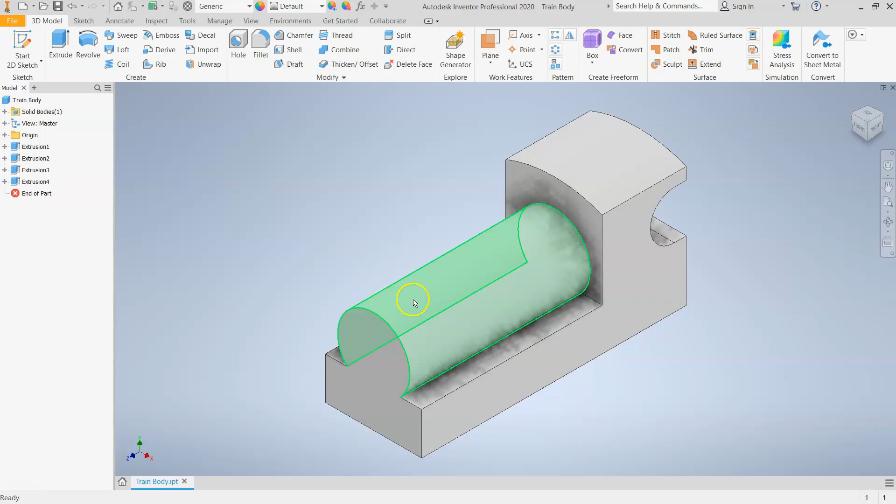We're going to learn how to make a flat plane on this curved surface here so that we can drill a hole in the top. And then we'll also drill holes in both sides for the wheel axles.

And then the last part we will need, and this you can't see from the diagram, but we need a hole back here for the hitch that's going to go there so we can connect cars to the train, in theory.

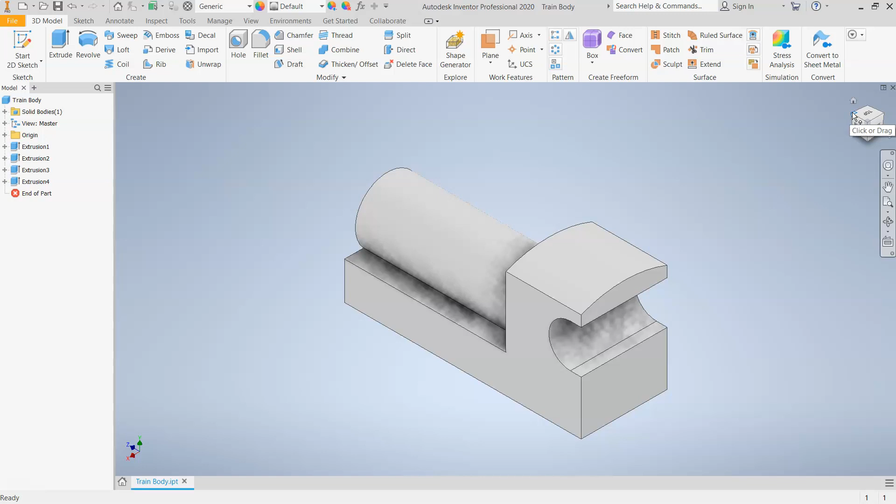So we're going to learn how to use the hole tool among some other things. If you're looking at your diagram of the train body, there's a couple of different symbols. First, remember the O with the slash through it, that's diameter, so that tells us the diameter of the hole. But you also have this down arrow, and the down arrow represents the depth of the hole. When you drill a hole, you can control how deep the hole goes, and that's what we're looking for with depth.

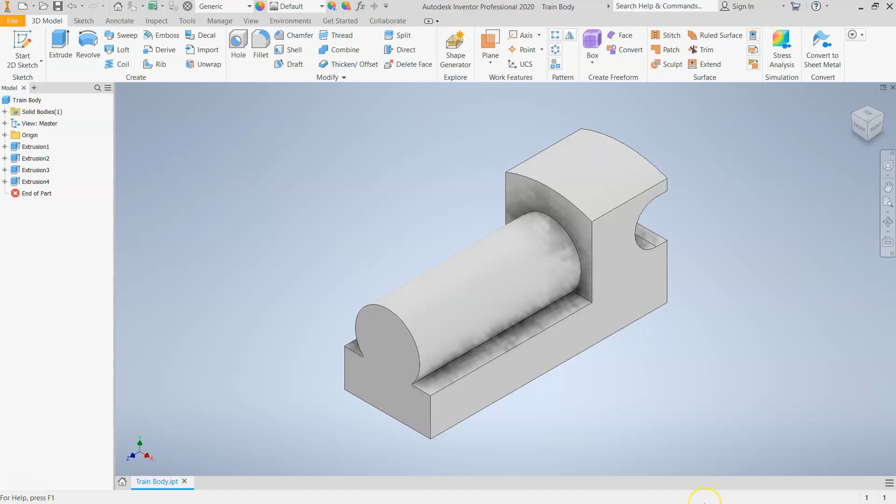For the axle holes, you'll also see something that says UNC. We'll talk more about that later, but basically in machine parts you have different kinds of screws that you can put in. It's a way of establishing exactly what drill bit to use and what types of bolts will go in those holes. So 1/4 inch 20 UNC is a very standard part, and we'll learn how to find that in the drilled holes menu.

Let's get started with just the front here. Let's go ahead and put the holes for the cow catcher. I'm going to right click on the front and then click New Sketch.

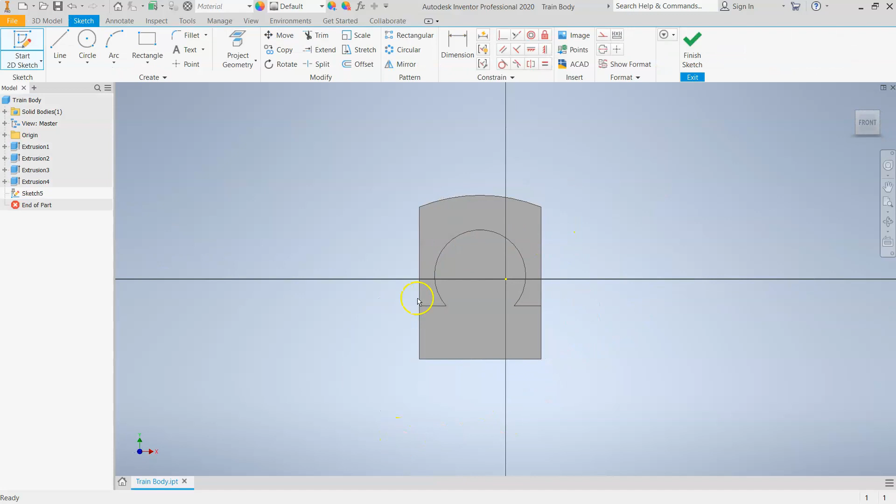And there's the front of the part. We are going to be placing... I'm going to go to point, click on point, and I'm going to be placing a hole here somewhere, and then a hole somewhere here, and then a hole somewhere here. So those are my 3 holes that I'm going to put in.

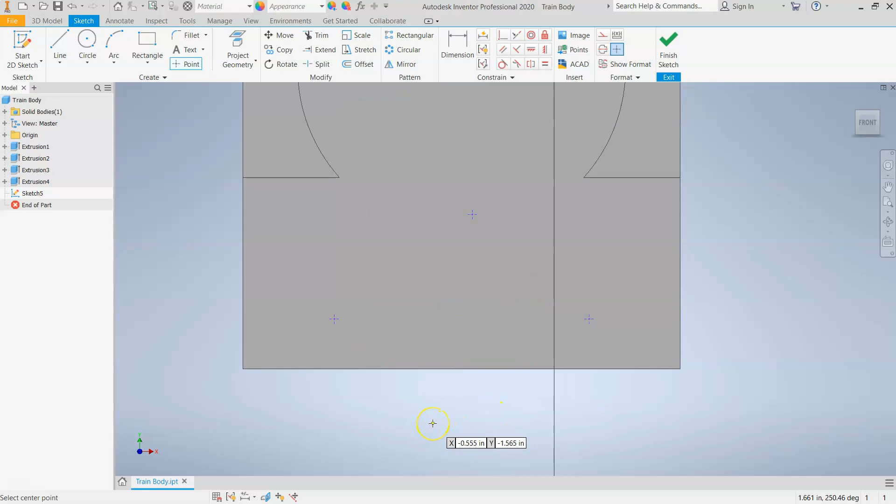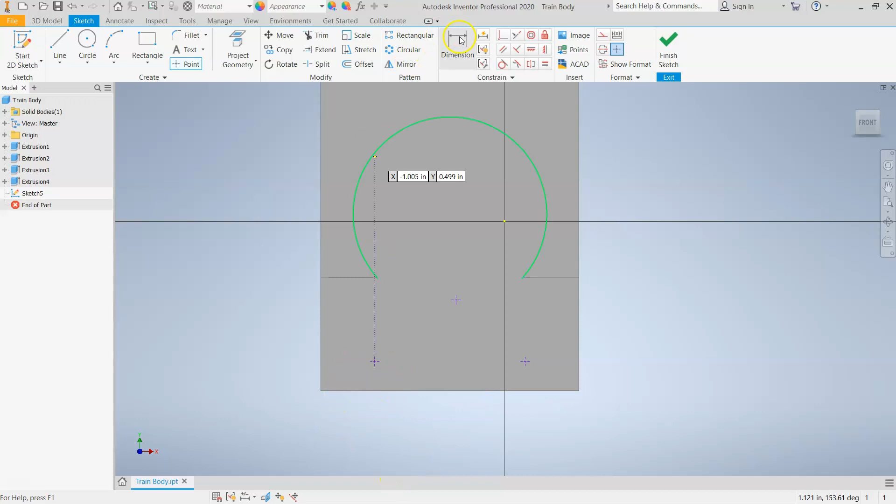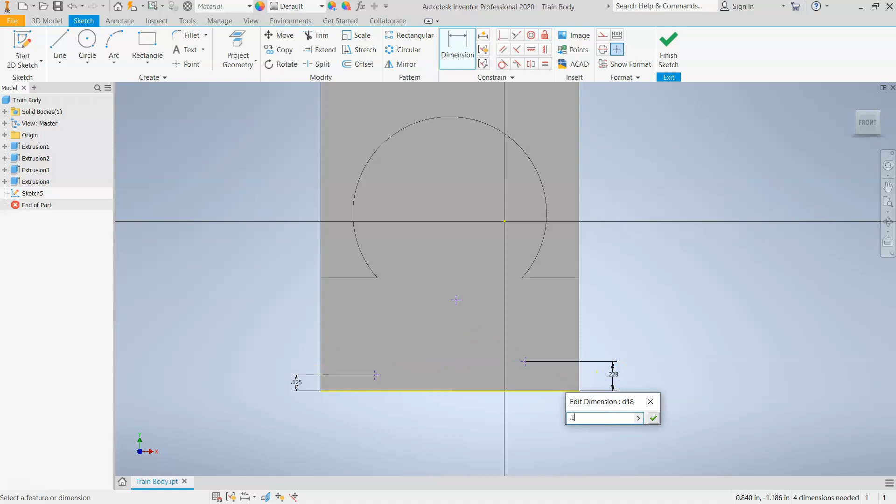I'm now going to dimension those individual marks based on the measurements on the diagram. First I want to figure out how far from the bottom this hole should be. If we look at the diagram, it looks like the 2 bottom holes here are 0.125, so I'm going to dimension this point to the bottom as 0.125. This one as well from the bottom, 0.125. And then the top hole is another 1/2 inch above that.

So it's going to be 0.625. Now we've corrected those for the y-axis. We need to now place them horizontally, and it looks like we have a dimension of 0.375 from the left. So this left side is 0.375 from the left edge, which means it's going to be 0.375 from the right edge.

Now, the diagram that you have says measure everything from the left. So I can click the left side, and I can click the far right dot, and I basically know that it should be 0.375 from the far edge, or we can just type in 1.625. And if we added 1.625 to 0.375, you get 2 inches, which is the total width. So that's another way to do it, all using the same beginning point, as opposed to dimensioning from the left and then dimensioning from the right.

The top hole should be centered, so that just means it's going to be 1 inch, exactly, from either left or right. So now those placements are done, we have them in the right place. So we're going to finish sketch.

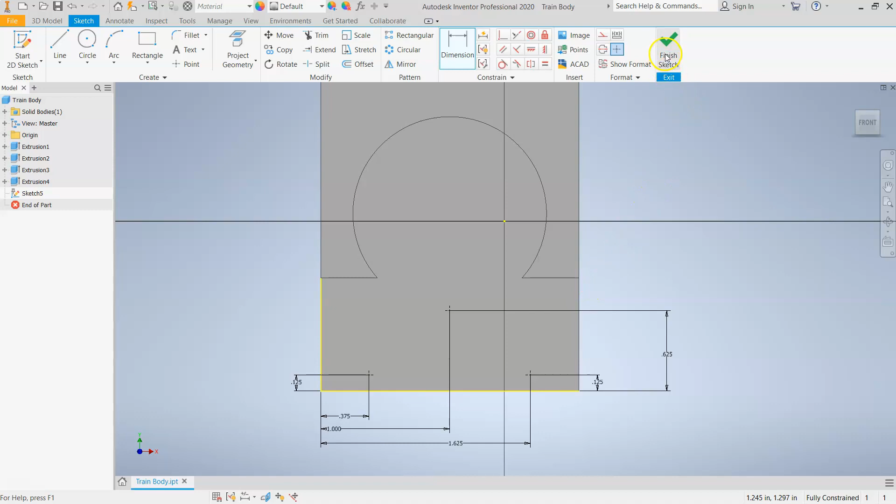So I still have my marks. These are called center points when we make holes. The next thing we want to do is use the hole tool. Now I could have, in theory, drawn a circle and then extrude cut the circle, but that's not really what we want to go for here, because we want the information about that hole to show up when we do the drawing sheet, such as depth.

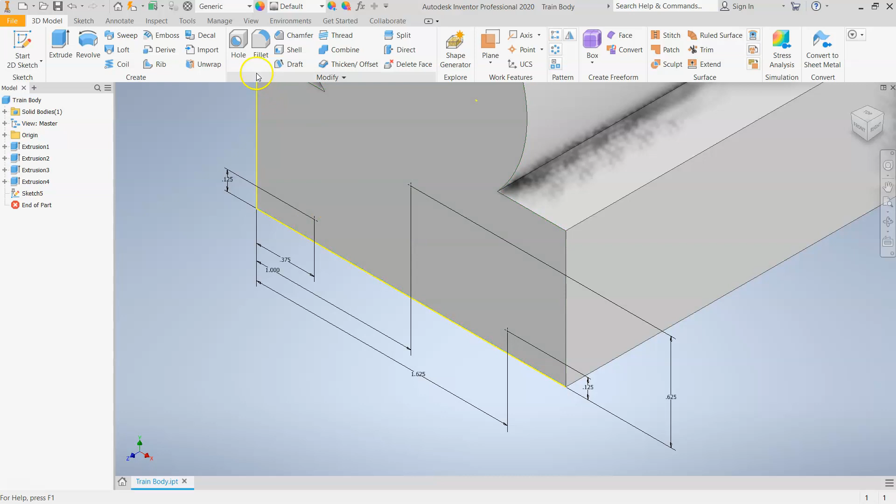If you just extrude cut a circle to make a hole, you wouldn't get the information for depth on your drawing sheet. Okay, now that I have my marks created on the front, I'm now going to drill holes. So I go to the hole tool. Now, a couple things about holes: there's a lot of different types and sizes. Some of them have 2 different diameters because the top is wider than the bottom, so there's a lot of options. First thing you want to do is make sure you're on presets, and you want to do no preset. So this should be straight, a straight cylinder.

Then we want to make sure that we've selected all 3 points, and it has. It is a simple hole. And then we have termination. So we're going to change the termination. Termination tells you how deep the hole should be. According to my diagram, the hole depth is 0.125. So it's a really shallow hole. You can see how shallow that is. It doesn't matter if it's flat. Let's just change it to flat, and that'll get rid of that number.

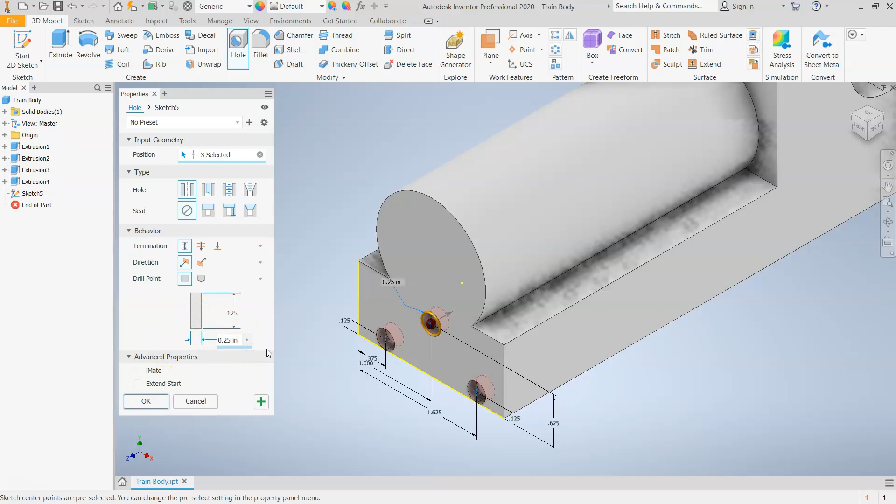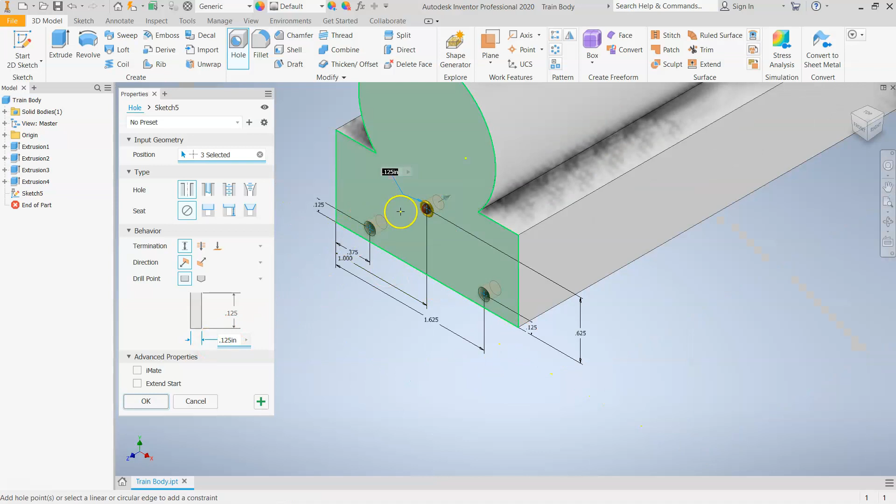Now, what's the diameter of the hole? It's the symbol with the circle with the slash through it, and you see that it's 0.125 as well. So these are tiny holes. Oh, I gotta delete the previous number. There we go. So we have 3 holes. They're all the same size. They're all going back in the right direction. And so that looks like that's finished. Click OK. And so now we have 3 holes drilled into the front of the train.

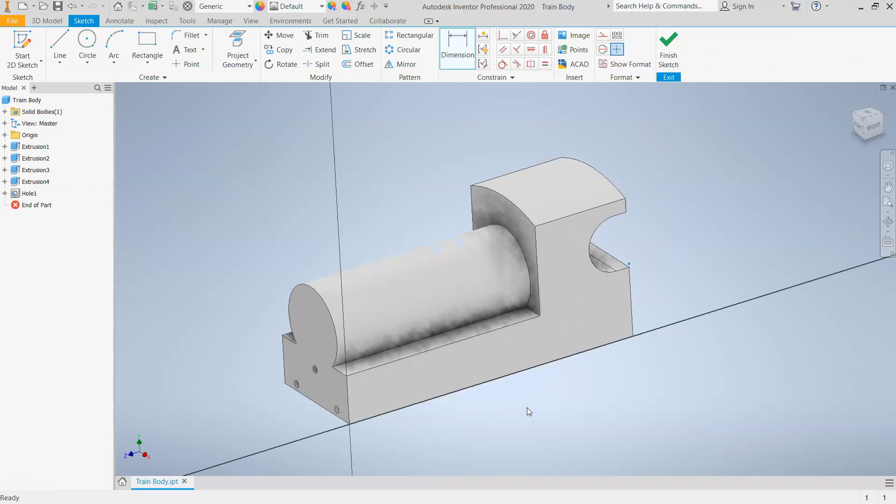All right, we're going to do the same thing with the side. New sketch. All right, and so we want to place marks. I'm going to place a mark here. I'm going to place a mark here. Now we want to use the dimensions on the diagram to find out where those marks are located. So along the x-axis, this mark should be 1 inch from the rear of the train. And this mark should be 4.5 inches from the rear of the train.

Height-wise, both of them should be 0.5 from the bottom of the train. So those locations are good. Finish sketch. Now I'm going to drill holes. Go to hole tool again. This time the hole says 1/4 inch-20 UNC. So in order to get that kind of hole, instead of a simple hole, we want to go to tapped.

Now tapped brings up a whole other menu here that we did not have before. So we go to tap. Now understand, when we say tapped, if you went to Lowe's, tap just means it's threaded. So this already has threads inside the hole. So it is a unified screw. Right now, you see the number 5 right there. That means it's metric. So I know it's not metric. So I want to open this up, and it says 1/4 inch. So I'm going to select 1/4 inch. And sure enough, the designation is 1/4 inch-20 UNC. That matches the information on my diagram. So this is the hole that I want.

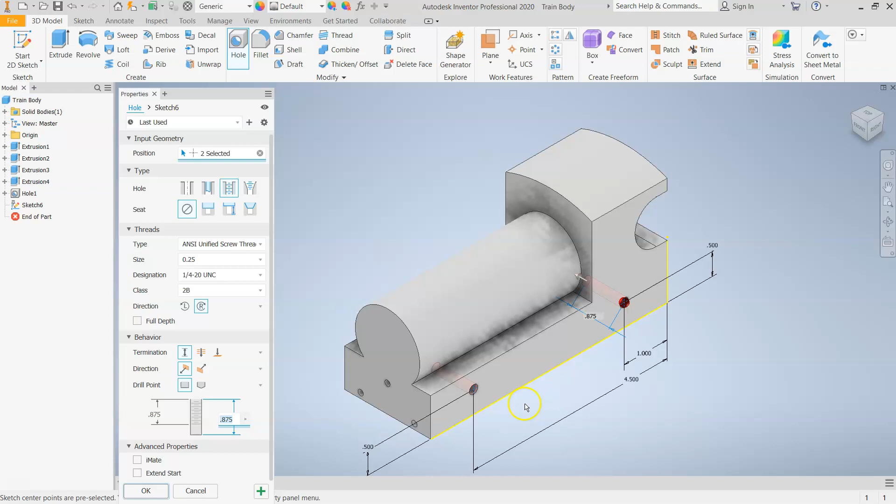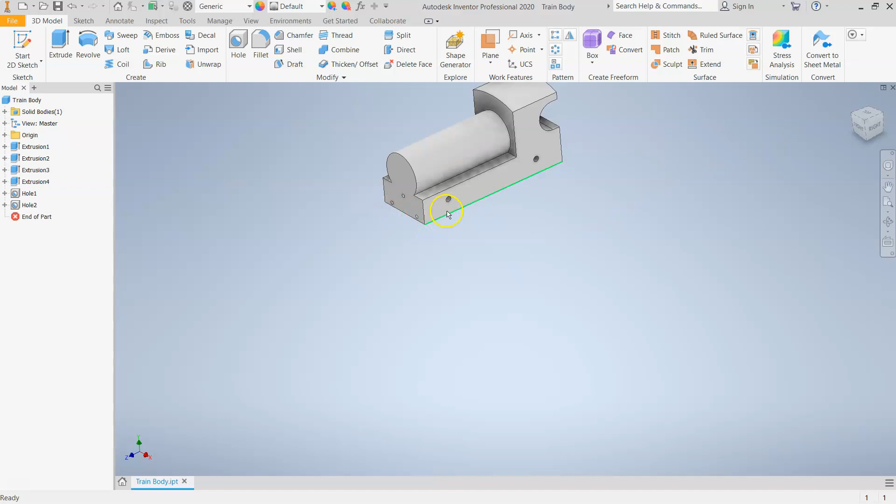And then I've selected both holes. We're good there. Click OK. Now, if we zoom in, you can see inside the hole. And this is how Inventor illustrates that it's threaded as opposed to regular simple. See, there's no little spirals in here, but we do have the little spiral design here. Okay, so that's one side. Let's flip to the other side and do them on the other side.

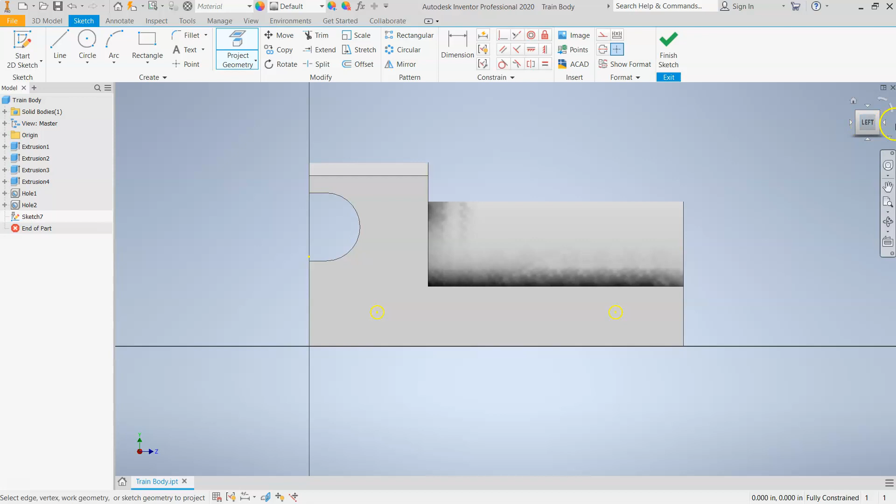Now I'm going to show you a quick, easy way to do this. So once we put a sketch on the other side, instead of redimensioning all the hole marks, we're going to do project geometry and hover over where I think the hole is. So once I find the green, click once and click again. And now we've projected the locations of the holes. We know that those are in exactly the right spots. So I can finish sketch. And now I can drill the holes.

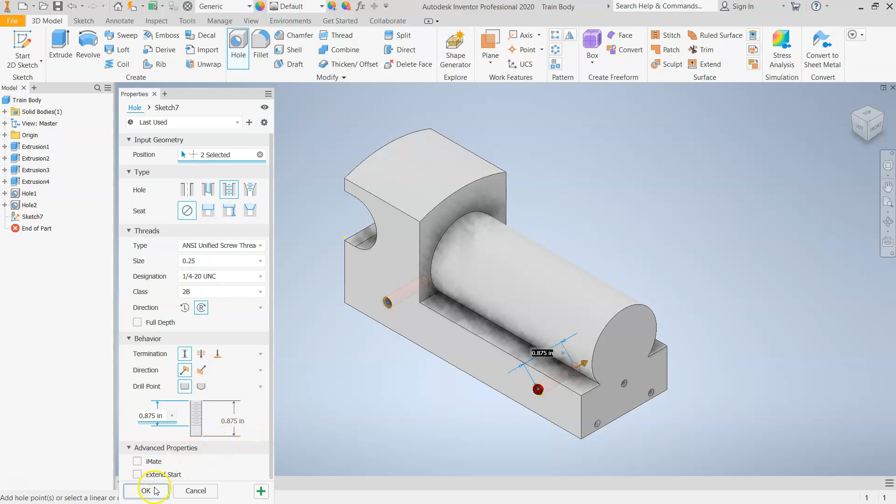We're going to use the same method. It's already selected for us because it's what we did last time. So what it says here in red, select positions. So I'm going to select this first one. And then I'm going to select the second one. So now I have the two holes selected. Everything else is the same from previous. Click OK. And so now we have axle holes drilled on either side of the train.

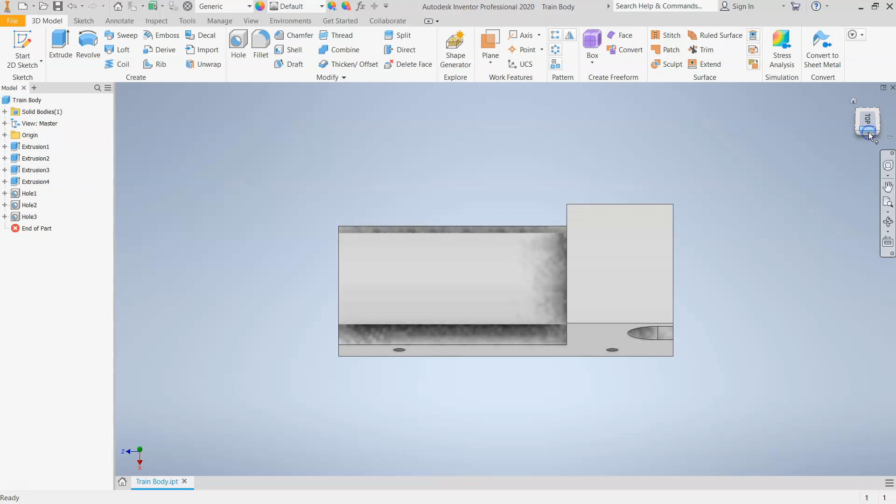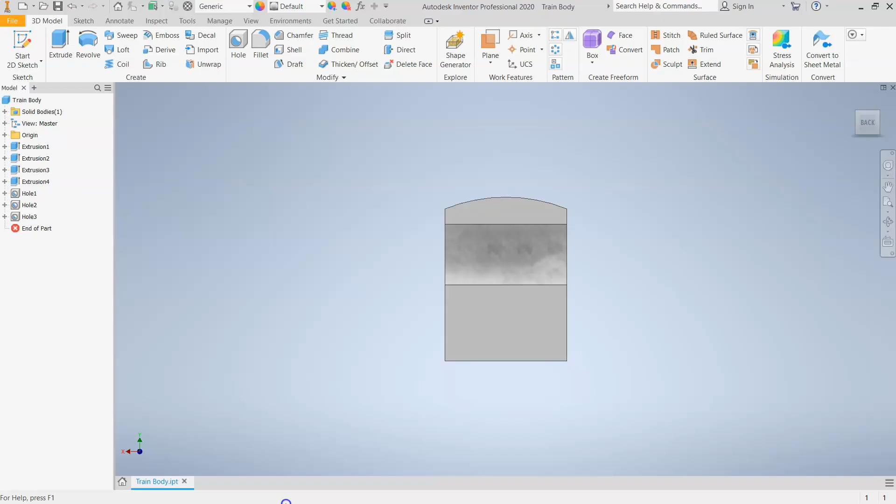All right, next step. We need to drill a hole in the back. Whoops. So to find the dimensions for the hole in the back here, we're going to open up. So we have a diameter of 0.25 and a depth of 0.5. And it should be 0.375 from the bottom. Let's try and remember those. So I'm going to place a mark. Well, first of all, I'm going to put a sketch, new sketch.

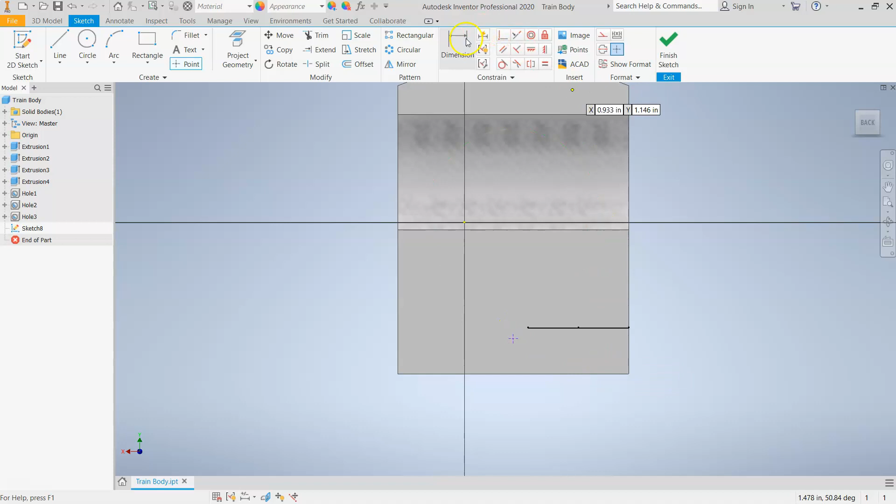Place a point somewhere. Now notice what it's done. It tried to make me select something from the other side. So I'm going to make sure I avoid those lines that have popped up. So I'm just going to click it here. So now I'm going to dimension from the bottom. It was 0.375. I'm also going to dimension from either left or right. It's got to be centered, so it doesn't matter which one you choose as long as you put 1 inch. And then we'll finish the sketch.

Let's get an isometric view so we can see it a little bit better. I'm going to drill a hole. Now this time the hole's not threaded, so what I need to do is go up here and select simple.

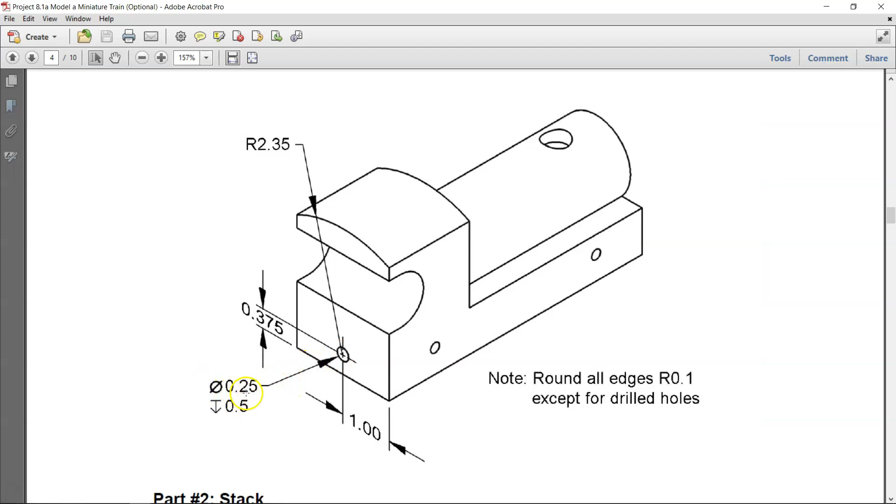And this should turn back to a straight hole where all we have is the depth, which I'm going to change my depth to 0.5. And then we have a diameter, which I'm going to change to 0.25. Let me double check that. A diameter of 0.25 and a depth of 0.5. I think that's what I said. Yep. And then click OK. So now we've put a hole there in the back.

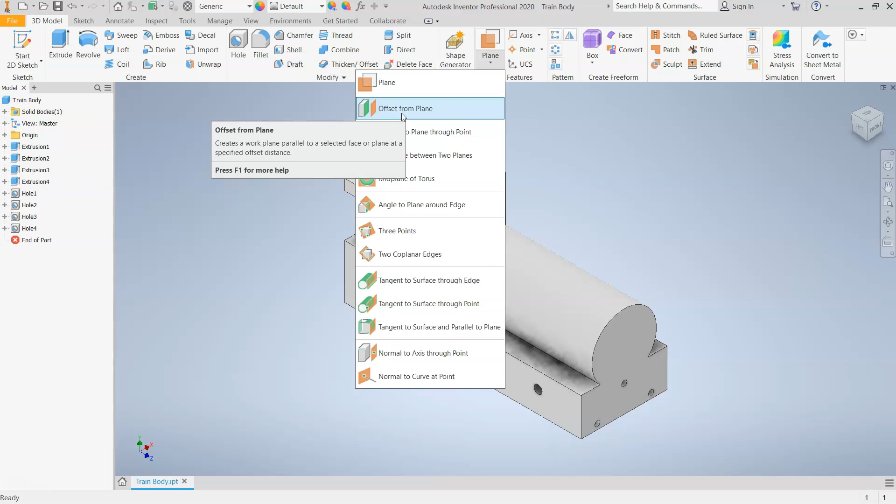The last thing is the most difficult part of all this. We're going to need to put a flat surface. You cannot draw a sketch onto a curved surface. So what we're going to need to do is create an imaginary plane that is flat on top. So the way we do that is we go to planes and drop that menu down. And let's get an offset plane. Offset just means you start at point A and you move it parallel to another area. So offset plane, I'm going to select this.

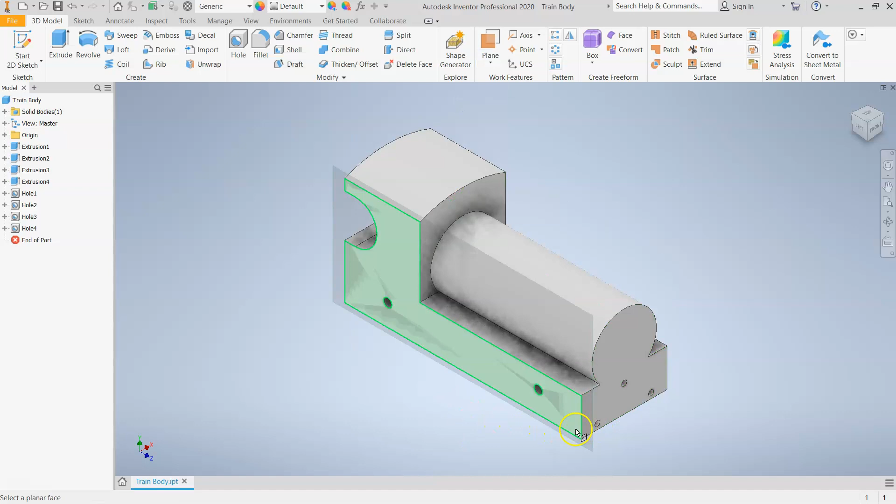That's what I want, this flat spot here. So I'm going to offset it like this, just dragging the arrow. Actually, let's choose the bottom. That way we've got a nice wide surface. So I don't want the side, I don't want that, I want the bottom. There, that's what I want. So I'm going to click here, and I'm going to drag it upward until we can see it's still cutting through the train here. So I'm going to drag it upward.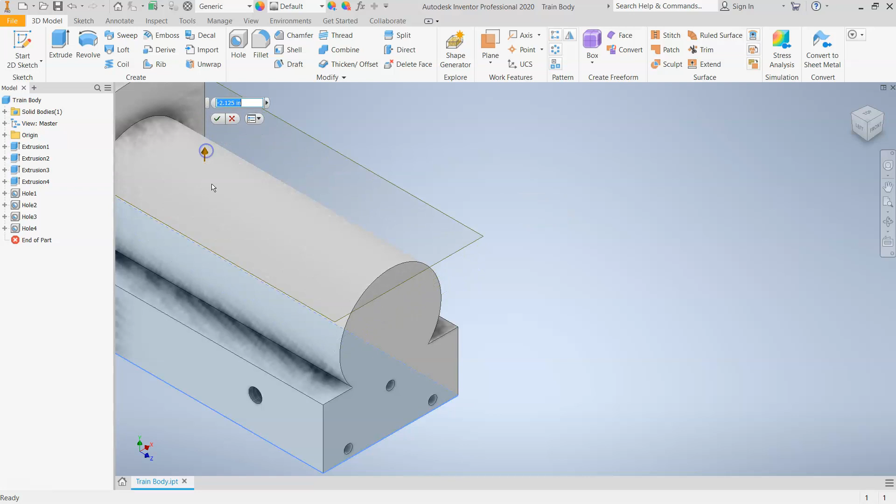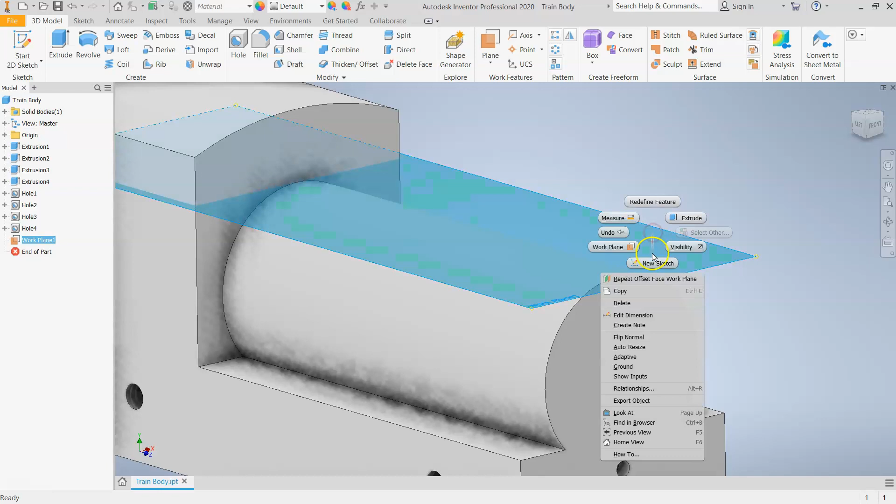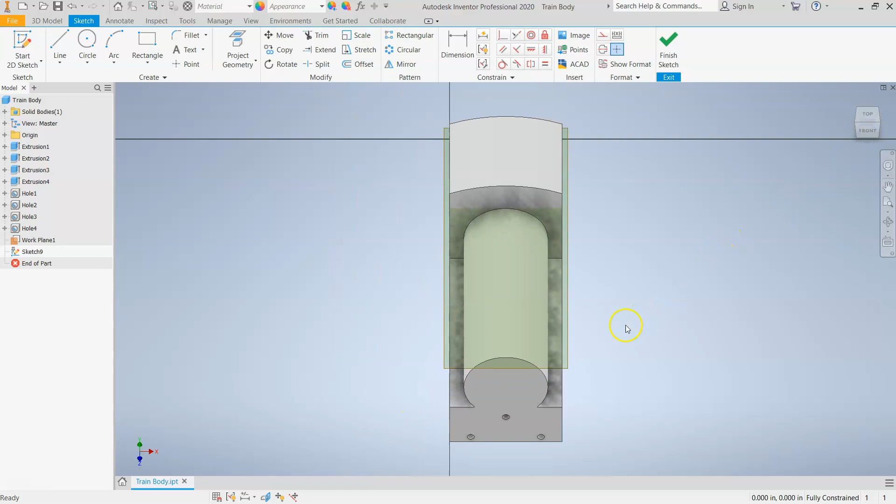There we go. Now, if we turn it to the side, you might be able to see the plane is resting right on the top surface. That's what I want. So now that I've got this plane, I'm going to click OK. I can put a sketch on this plane. So I'm going to right click on the edge of the plane, right click, new sketch. And now I'm just zooming around a little bit so I can make sure I get, sorry about that. This is where we're going to put it. Right here. So if I angle it, you can see I'm putting it on the front of the train, the hole for the smokestack.

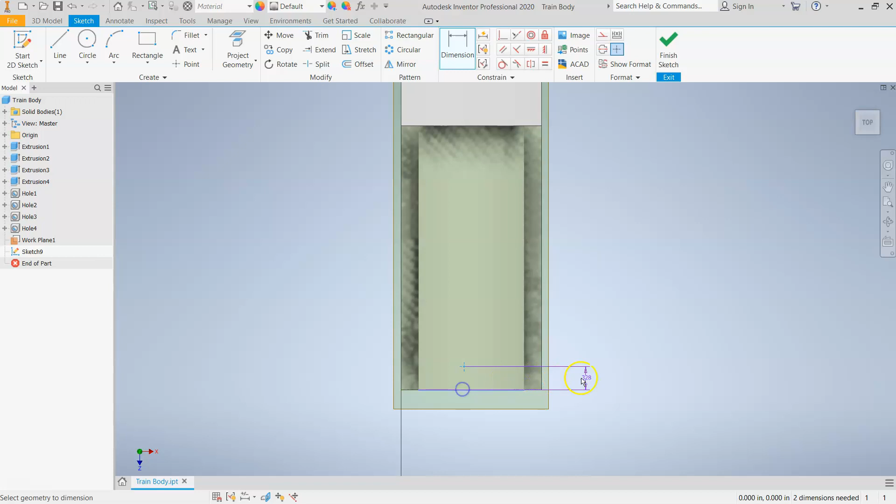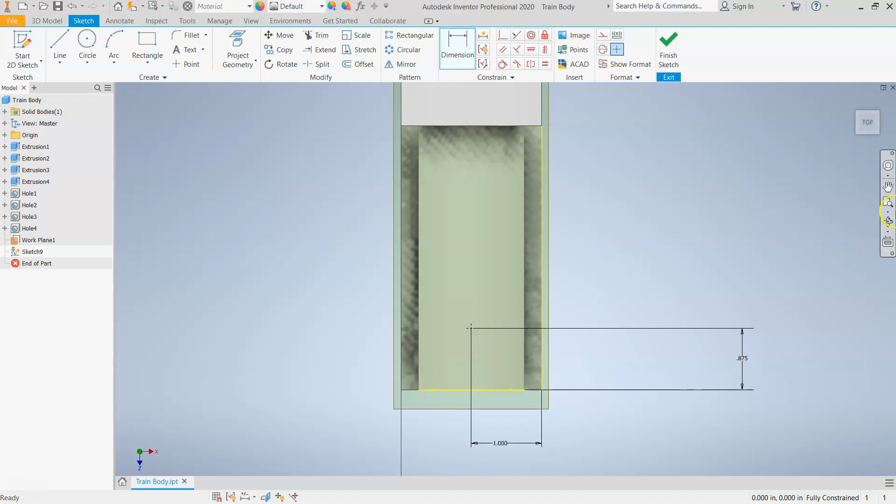All right, now we need to look back and see the hole for the smokestack should be 0.875 away from the front of the train. So I'm going to put a point here. And the distance from the front of the train should be 0.875. Now, the smokestack should be centered. So from the outside edge of the train should be 1. And now it's centered and it's the right distance from the front of the train. So I can finish that sketch. I've got my location plotted.

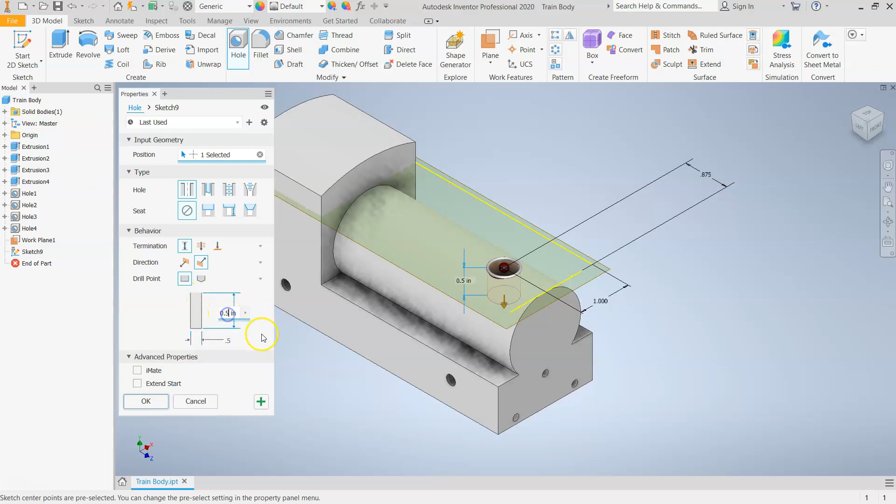Now I want to drill a hole. So take your hole tool. It's already selected it for you. All we have to now do is change the dimensions. And it is a diameter of 0.5. So I'm going to go ahead and change my diameter to 0.5. And then a depth of 0.25. So it should be wide and fairly shallow.

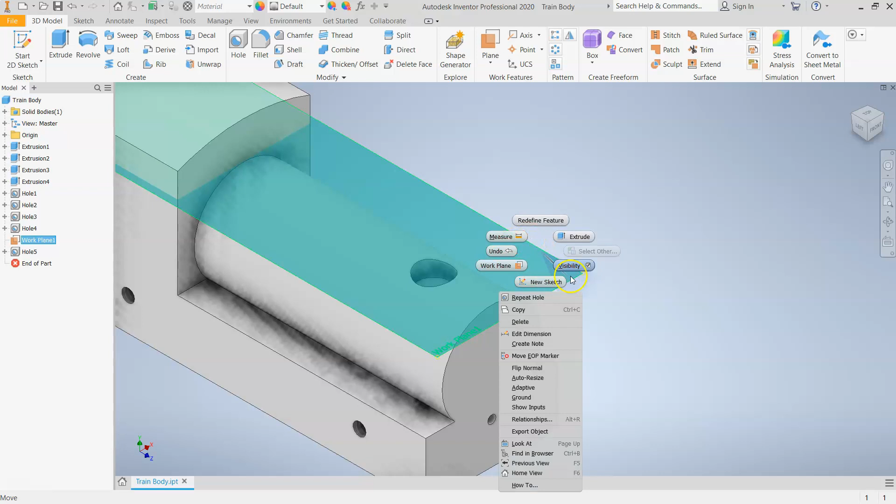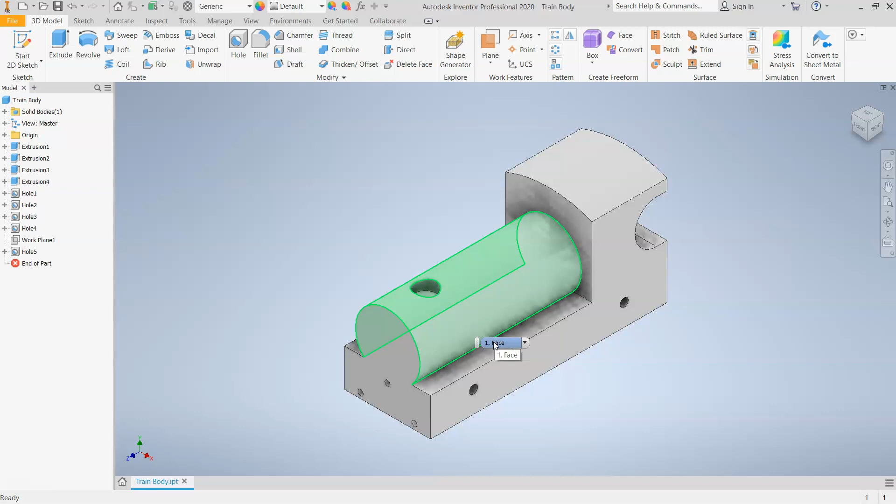And click OK. Now, we don't want to go through the entire rest of this project and still have this plane visible. So I'm going to right click on the edge, get the circle menu up, and then where it says visibility, just uncheck that. So now we have the train body and all the holes drilled. The final step is to go through and put fillets on all of these sharp edges. Remember, this is a kid's toy. And so you want to round off any of these sharp edges so that the child that's playing with it wouldn't get splinters. Not to mention, it just makes it look better.

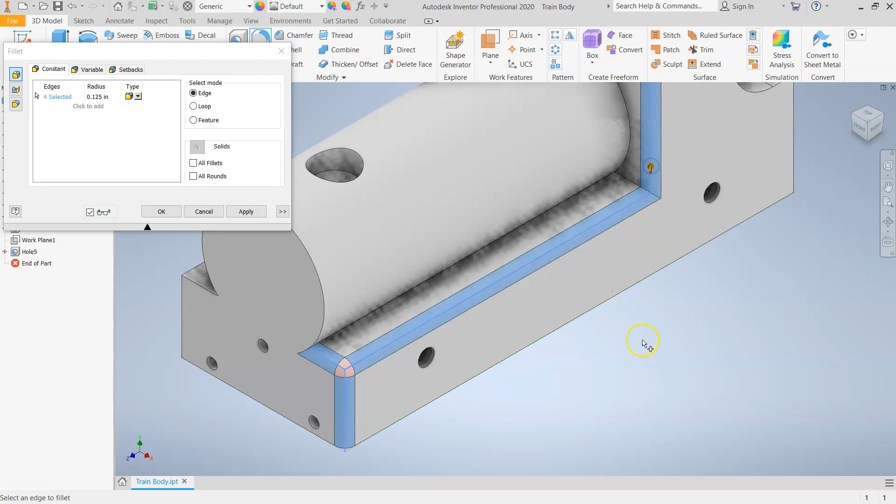So our fillets, according to our diagram, there are no fillets on the diagram. Okay. So we're going to do a fillet of 0.125, I believe. Let's try that. So we're going to take a fillet. It starts off as 0.125. I think we're going to keep that. Let's see. We're just going to click all of these sharp edges like this. Do not change the bottom. Leave the bottom alone. And so I'm just going to follow this around without doing the bottom.

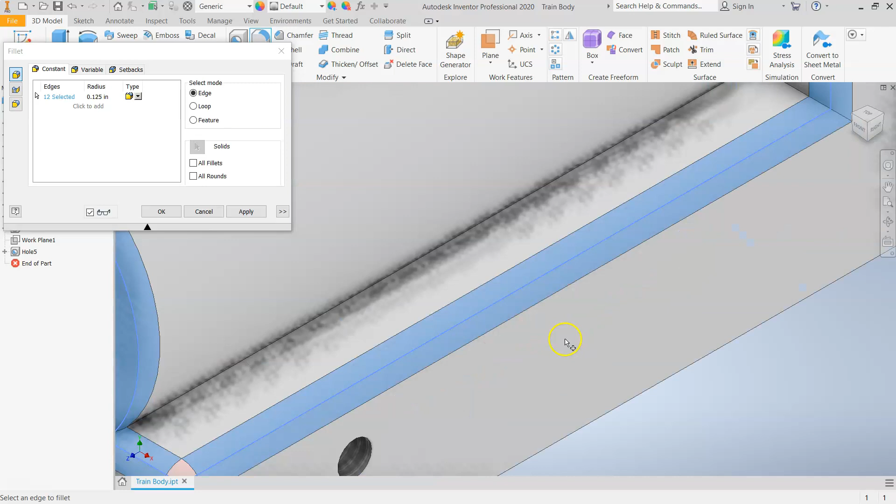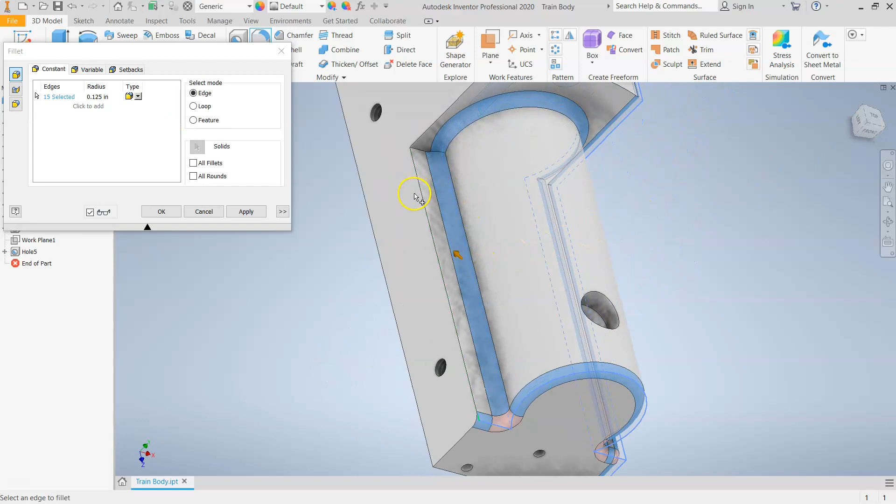I'm also going to fill in this, and what you'll see is right now, it still kind of looks like there's a cylinder just put on top of a block. But if we fill this part in, it's like taking wood putty and filling the gap in there. It makes it seem permanent. Do the same thing on this side. Do that there. I just want to make sure it's done all the way around.

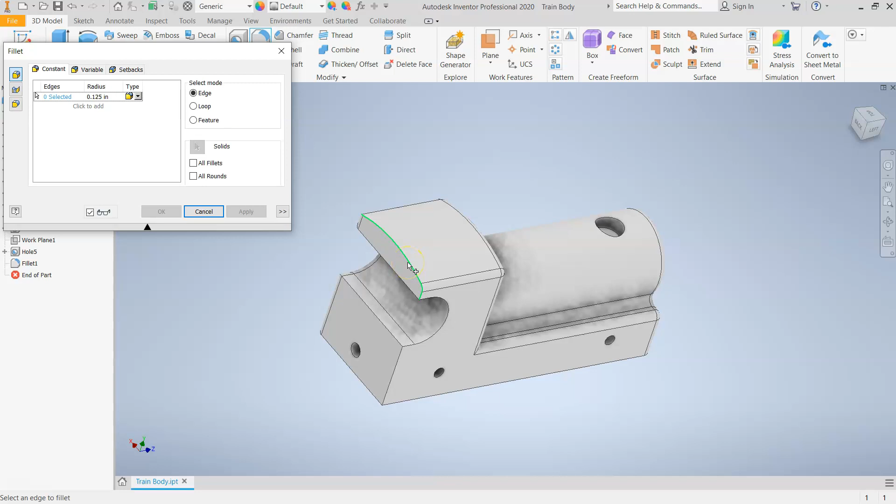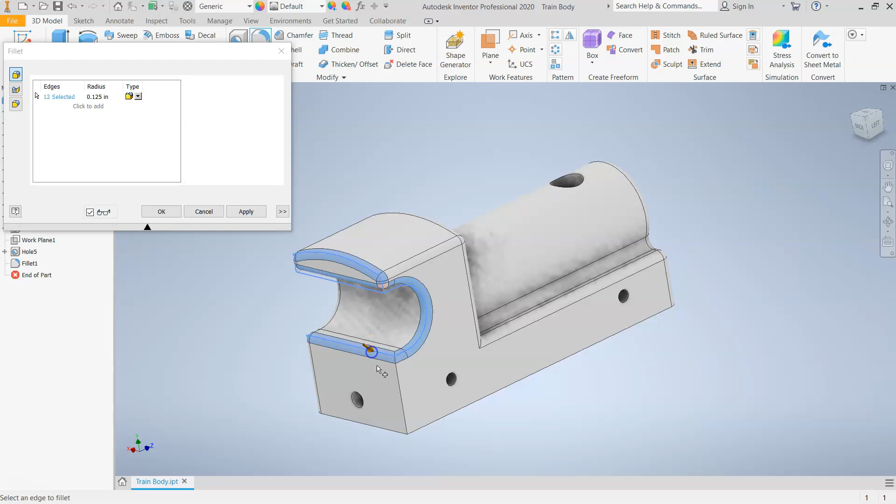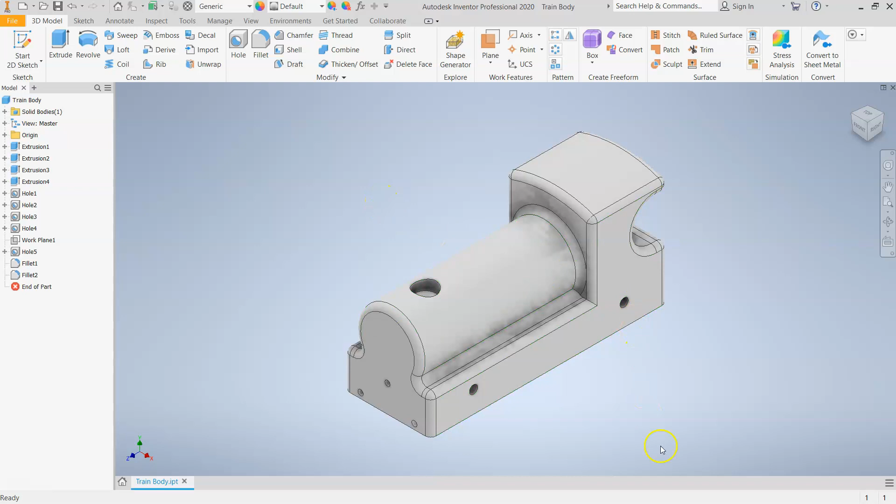Now, of course, you could click a couple of these and then, you know what, let's do that. Click apply. And that way I can click some more, because basically if I had messed up then I would have to undo or redo all of those I just did. But because I did those, I've already saved those. I don't have to go back and undo them if I mess up later. Once again, we're not doing the bottom of it. All right. That should be it. The next thing we'll do is the drawing sheet, and that will be coming up soon.